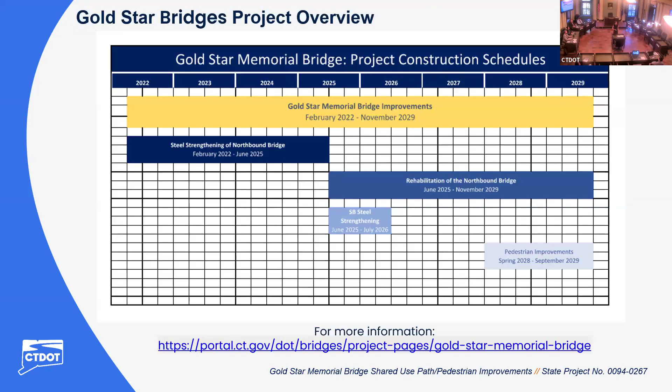At this point, I'd like to turn it over to Michael Giacovino from CJM, and he's going to go through more of the improvements that are proposed on the bridge itself.

Thanks, Tracy, and great job staying composed during the technical difficulties. So again, I'm Mike Giacovino. I work for Close, Jensen & Miller, or CJM, and we are the design engineers who are doing the portion of the path that's actually going to be on the Gold Star Bridge itself.

When I say Gold Star Bridge, there's actually two structures that carry the path. 2514A, the long one, that's what you think of when you think the southbound Gold Star Bridge. It's the large truss, big girder span. Over on the left-hand side of the photo is 2514B, which is a 3-span bridge that also carries the path. That bridge is the connector, the ramp from 95 southbound to Route 32.

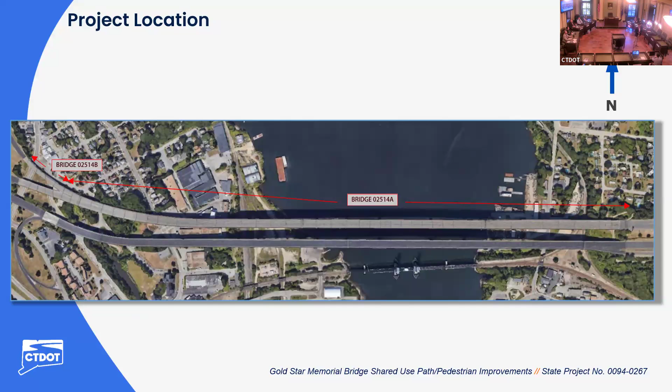Here's a view of the 2514A bridge from the Groton side. We're on the east side of the bridge, looking west. The red line you see is the current alignment of the path. It's going to remain, at least on the bridge, about the same. You can see the dash lines where it goes underneath the bridges to Bridge Street, off to the right in Riverview Ave, it circles up, and it's on the right-hand side of the Gold Star southbound bridge, as I'm sure you all know.

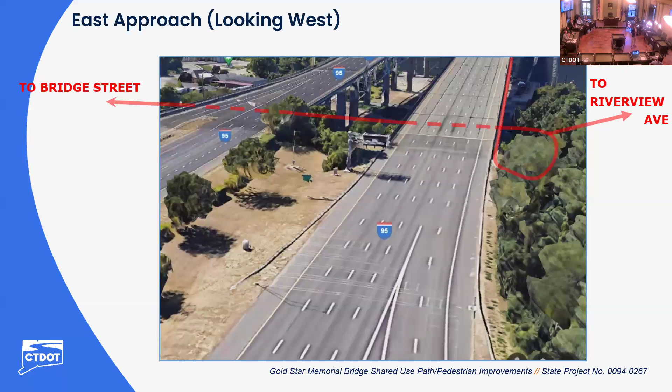Again, this is over on the New London side, still looking west. You can see the path stays on that right-hand side, and it goes up to that blue polygon in the top right-hand corner. That's the B bridge, 2514B, just to give everyone a sense of what the site really looks like.

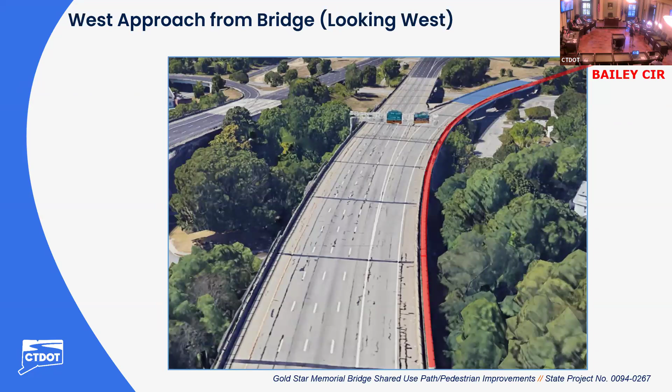So the path is going to remain on that right-hand side on these cross sections. It's left because we're looking the other way in the bridge. You're going to see a series of cross sections over the next few slides, giving you the existing section, which you see on the bottom, and the proposed section, which you see on the top. This is what we're calling the typical section.

This is valid for the majority of the main Gold Star Bridge. In its existing state, you have a give-or-take 5-foot wide pathway, a 10-foot shoulder, and 5 lanes southbound. What we're going to do is remove one of the southbound lanes, and widen the multi-use path to 14 feet wide. So you're going to have a 14-foot wide path, a metal bridge barrier, a 12-foot shoulder, and then 4 lanes of traffic.

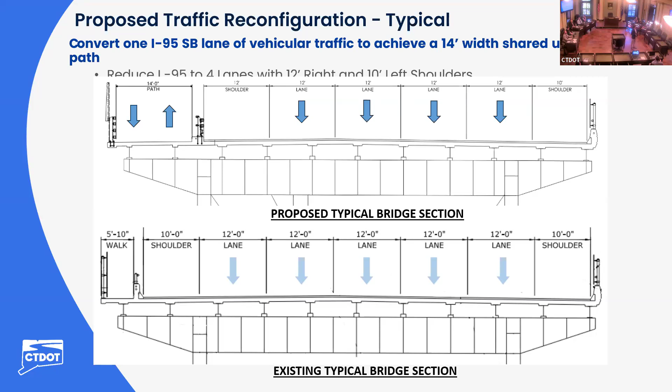This is another cross section still on the main Gold Star Bridge, a little further closer to Groton, in spans 29 and 30. Span 26 of the bridge actually begins to widen from the previous cross section we showed you, and it adds an extra lane. Existing, it's 6 lanes southbound and still that 5-foot pathway. We're removing one of those southbound lanes again, so it's going to be 5 southbound lanes, a 10-foot shoulder, the open bridge rail, and that 14-foot path. That 14-foot path is maintained across the entire bridge, including the next one, which you'll see on the next slide.

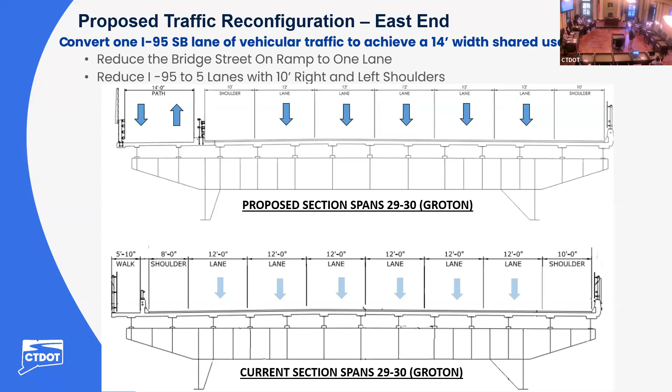This is that B bridge, the ramp from 95 South to Route 32. Currently it's 2 lanes; it's going to reduce to 1 lane with a 10-foot shoulder, and again our 14-foot wide path. So this 14-foot wide path is the nominal width, and like it does now, it is going to have 2 types of pinch points, which you'll see on the next slide.

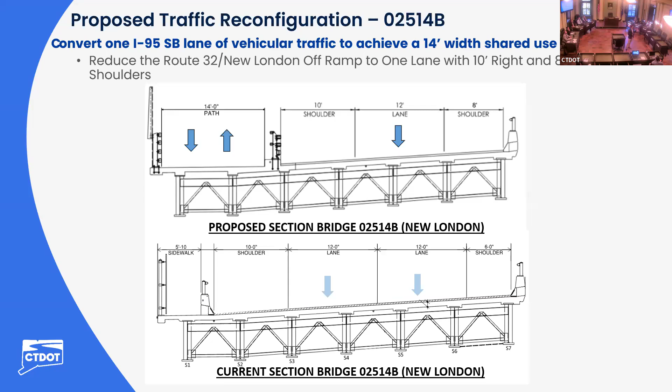The first one you'll see in the rendering on the left is the light poles. Currently, they're mounted to the concrete barrier that separates the path from the roadway. We don't have a concrete barrier anymore, so we need to mount them behind the railing we're putting up. That's going to be about a 2-foot wide foundation. The path will taper out and then back in, down to 12 feet at those light pole locations.

The other one is the large overhead sign supports, which you see in the rendering on the right. Those foundations are a little wider, 3 feet wide, because the sign supports are so large. They're holding up those big giant green signs you see.

There are 3 of these locations: span 7, 15, and 21. At these locations, the path will taper out for 3 feet for the sign support, then taper back in. So the minimum width over the whole bridge is 11 feet, more than double what you have now. That should give plenty of width for 2 bicyclists to pass with room in between—I don't want anyone bumping handlebars.

I actually walked across the bridge a couple weeks ago, and it's tight. I had a bike come up behind me and a moped come up behind me. That's not going to be a problem anymore—well, the mopeds we can't speak to, but it's going to be plenty wide.

In order to build this, it's coming on at the end of the project because they have to build it from the top side. We're going to have 2 work zones: the top one on the main bridge, 2514A, and the bottom one on the B bridge. At any given time on the main bridge, there will be a minimum of 3 lanes southbound, and on the ramp bridge, 1 lane southbound.

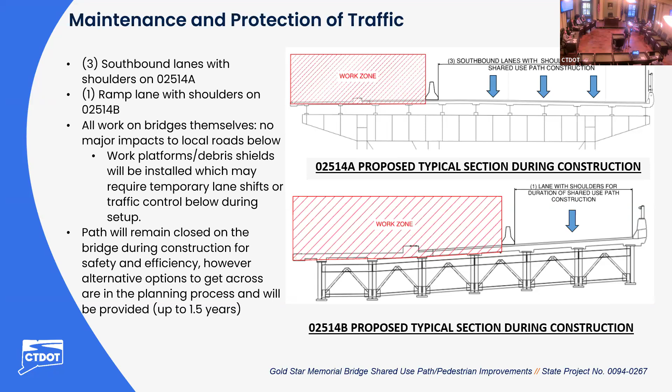During this up to 1.5-year outage, there will be alternative measures for people to get across who do not have a vehicle or are not using their vehicle. It's going to be something similar to the shuttles that were in place during the outage when that fire closed the bridge or the pathway last spring.

Good evening, Steve Frazier with BL Companies. BL, along with HNTB, designed the shared use path approaches to the Gold Star Bridge, as well as the intersection improvements at the Bridge Street intersection. This is the portion of the presentation where we'll go over those improvements. Next slide.

You've seen this area before, but I wanted to highlight the project area on screen. The portions I'll be talking about in this part of the presentation are highlighted in red. On the left side, the New London side, is the connection to Bailey Circle and Williams Street. On the eastern side is the Groton side, connecting Riverview Ave down to the Bridge Street intersection, as well as connecting up to the Gold Star Bridge.

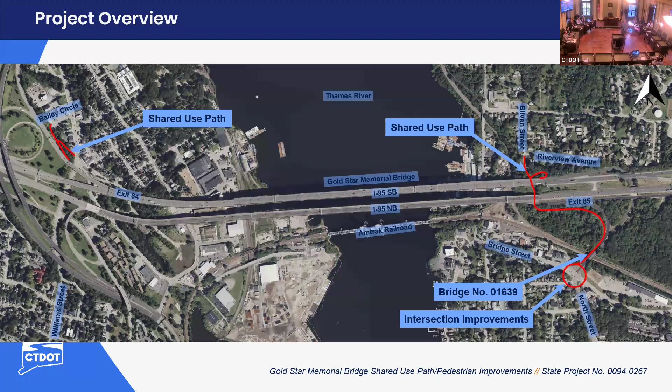Next slide. Some of the existing conditions out there now: the top left photo is of the New London approach. The existing sidewalk is about 5 feet wide, concrete, and gradually comes up to the Gold Star Bridge from Bailey Circle at about 3.5%. On the Groton side, the lower right photo, it's also an existing 5-foot wide concrete sidewalk, for the most part at grade. However, as you're all familiar, this area is the hairpin turn that is very steep. The existing grade is about 8.5% coming down from the Gold Star Bridge and winding around.

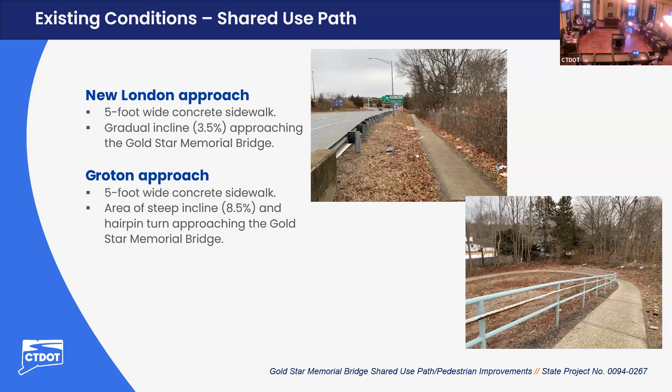Next slide. I want to go through the improvements we're proposing as part of the project. I'll start with the New London side first.

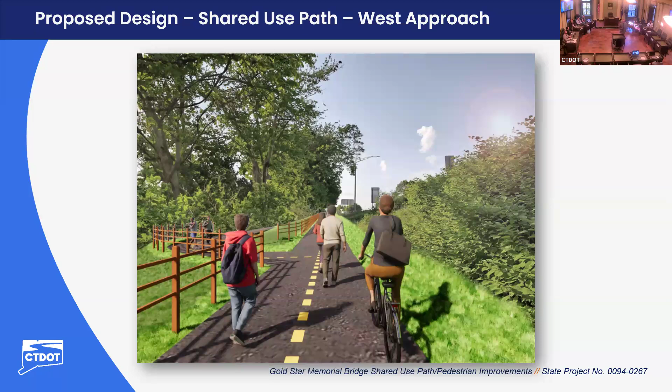The second thing I want to highlight is on the north side, that hairpin turn. We're extending the path toward the east coming off of the Gold Star Bridge to allow us to have a proposed grade, coming down the hill, of just under 5%. To remind you, the existing grade is 8.5%. So this allows us to meet requirements and it's a safer path. We do anticipate the potential need for a retaining wall on the north side of that turn, to prevent any of the grading from extending onto private property.

Also on the north side, we're replacing the connection to Riverview Ave. We're maintaining that connection, but reconstructing it with the 10-foot wide trail. The last part I want to highlight is as the shared use path winds its way southward, toward the bottom of the view, the on and off ramps coming off of exit 85 are supported over the Amtrak Railroad—it's bridge 1639. The shared use path is going to be reconstructed on that.

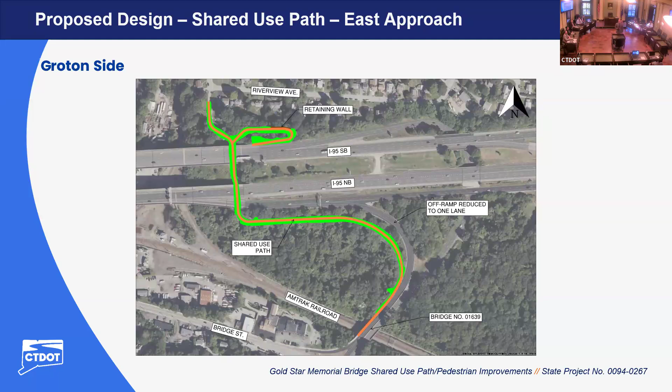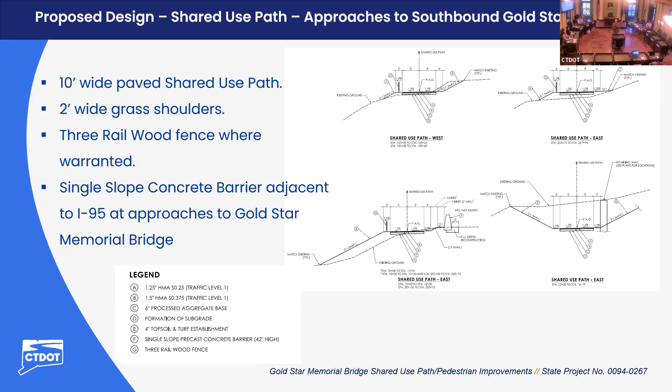We will be providing a 3-rail wood fence to discourage trail users from going off the trail and down a steep slope where it's warranted. We'll also be providing a concrete barrier, a single slope concrete barrier, between the shared use path and I-95 proper as the shared use path comes off the Gold Star Bridge on either side.

So what we're able to do for our proposed work is to remove that existing sidewalk and widen into the road, toward the right-hand side of that view. At the same time, we'll be removing one of the lanes of the off-ramp so that in that area we'll have 1 lane of traffic coming off of the highway over the Amtrak bridge.

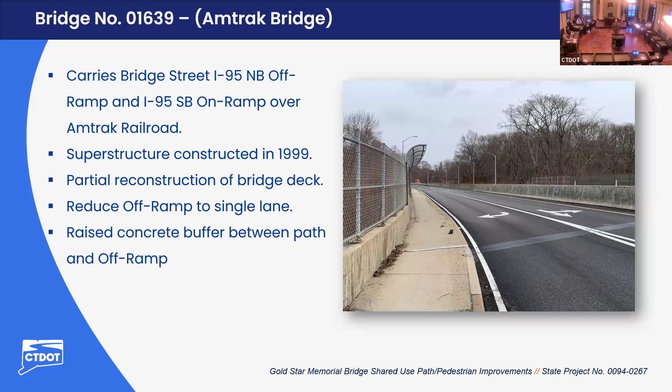On the next slide, it's a conceptual rendering of what that area might look like after construction. In the far background is the shared use path crossing the bridge. There's a small red strip in this view - that's the concrete buffer that's going to be raised, separating the 10-foot wide shared use path from the off ramp. In the foreground is a pedestrian crossing associated with the Bridge Street intersection improvements.

And with that, I think I'm going to hand it over to HNTB to go over the Bridge Street intersection improvements.

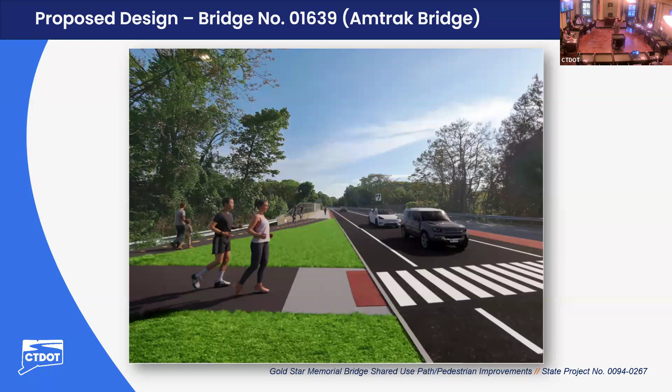So this here is just the existing conditions at the intersection. There's Bridge Street, and we're labeling them here east and west just to help differentiate them, North Street, and the I-95 on-off ramps. In this whole area, it is essentially a bowl - the center of the intersection is lower than the surrounding approaches, which requires us to raise up the intersection in order to put in a roundabout.

I did want to highlight that currently the crossing widths at this intersection are really wide, which doesn't really invite or encourage people to walk in this area. There are only 2 legs of this that currently have crosswalks, so again, not very connected. There's just so much going on, it doesn't lend itself to people wanting to walk - people don't feel safe crossing this area.

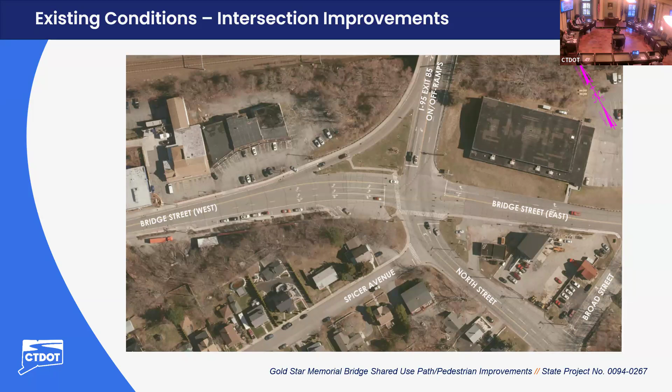So one of the things that we're proposing is a roundabout.

For our proposed design, we have a hybrid roundabout. It's not quite a turbo roundabout because we have 2 lanes coming from North Street - they go around part of the roundabout and then onto exit 85. But most of the other approaches, it's 1 lane in each direction. As you can see here, that's really reducing the amount of the crossing distance at each approach, and we would be increasing the number of crosswalks.

Also, on the upper left corner, what was a bypass lane coming off of exit 85 is now being turned into that shared use path and also a more green area rather than having that bypass. We tried to keep some of the existing parking over on the western portion of Bridge Street as well.

The nice thing about roundabouts is that it really slows people down, and so that increases pedestrian safety. We have the shared use path coming off from exit 85, but along the roundabout in those thicker gray areas, those are 10-foot wide paths connecting all the way around for shared use path, and then it would be connecting and tapering down to 5-foot wide sidewalks at the approaches.

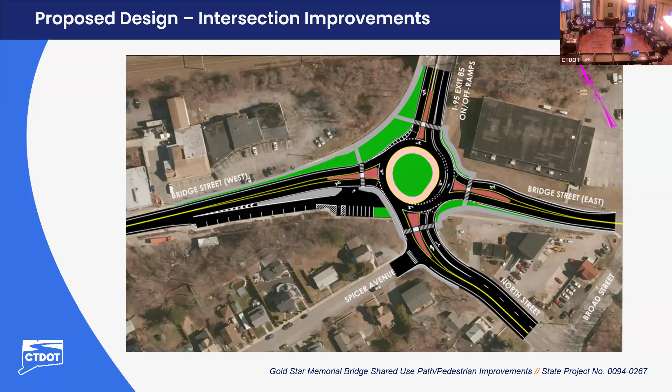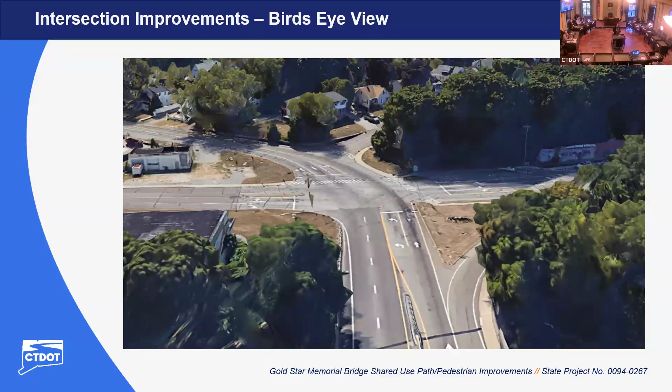This is just an image of a bird's eye view of the existing intersection, and here is a rendering of what this would look like approximately. You can see that path I was talking about, now on the lower right corner, would come around, and you can see where the crosswalks connect to those wider paths.

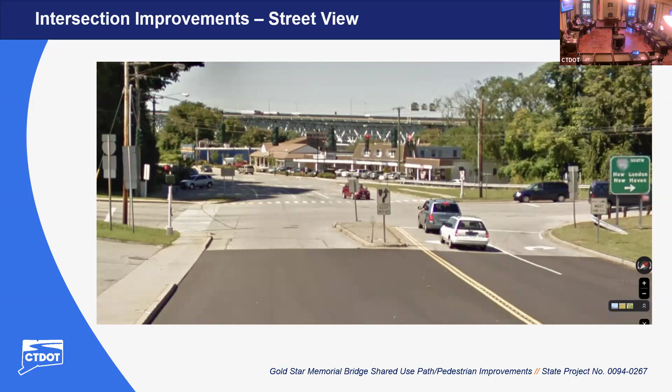This is on Bridge Street from the eastern side looking towards the west - existing condition, again really wide crossing areas. And this is a rendering of what it might look like in the proposed condition: again, more narrow crossings, as well as pedestrian islands and a truck apron and everything like that.

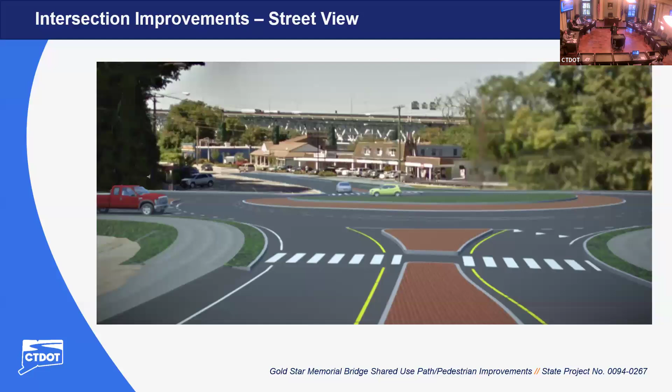Next slide, and I'm going to pass it off to Dave.

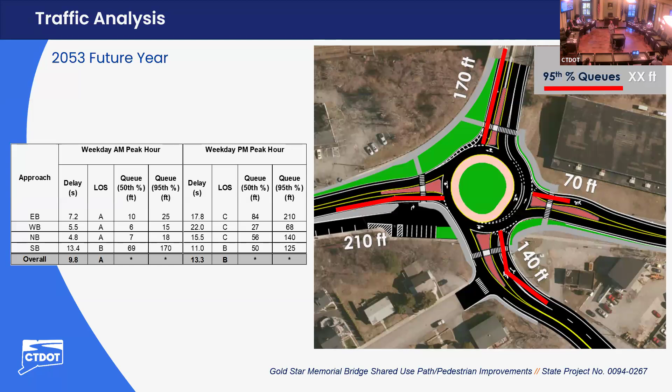It becomes a much more livable experience as opposed to a signal where you're waiting for that NB flow to come out of the south, which is an important place, but they do tend to dominate the intersection. This roundabout is going to be a great way to accommodate all of the users at this intersection, both vehicles as well as bicycles and pedestrians. As Sam noted, these are great means of slowing vehicles down and improving accessibility through the intersection for all the users in the area.

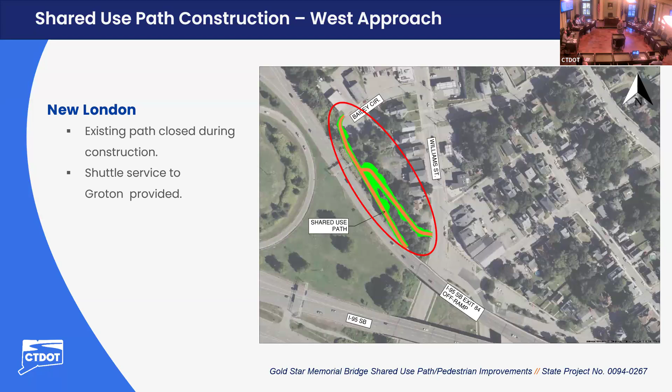Access from Bailey Circle to the Gold Star Bridge will not be provided during construction on the existing trail. It will be closed, and shuttle service would be provided to Groton. Next slide.

Regarding the Groton side of the shared use path, I want to highlight a couple different areas here. As I mentioned previously, the shared use path access over the Gold Star Bridge, circled in red on the top, will be closed during construction, and that area we anticipate to be constructed during the closure of the path on the Gold Star Bridge, kind of maximizing that closure time.

The other two areas circled in red, we anticipate short-term duration closures of the shared use path between Bridge Street and Riverview Ave. The middle red circle is a short-term closure because of improvements proposed under a separate project on the northbound bridge. And the lower circle, we expect short-term closures to construct the shared use path under this project.

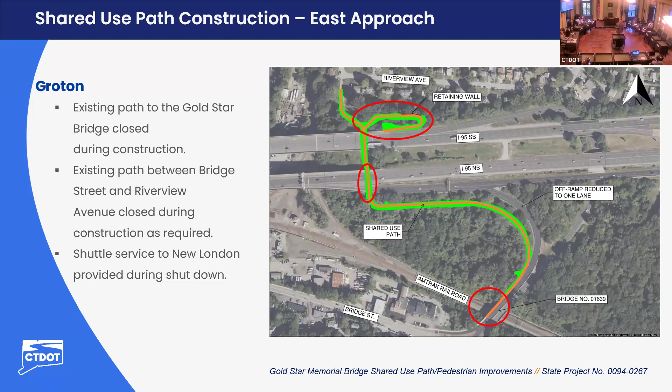Ultimately, we want to try to maintain access from Bridge Street to Riverview Ave as much as possible, so that will be an important aspect of the contract documents as well. Finally, during the closure where people cannot access the Gold Star Bridge shared use path itself, a shuttle will be provided to give that access to New London. Next slide.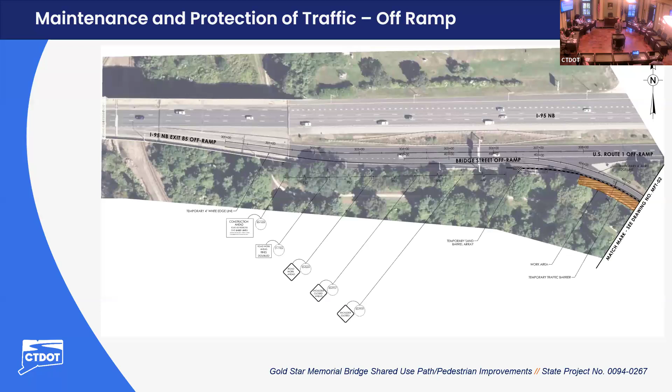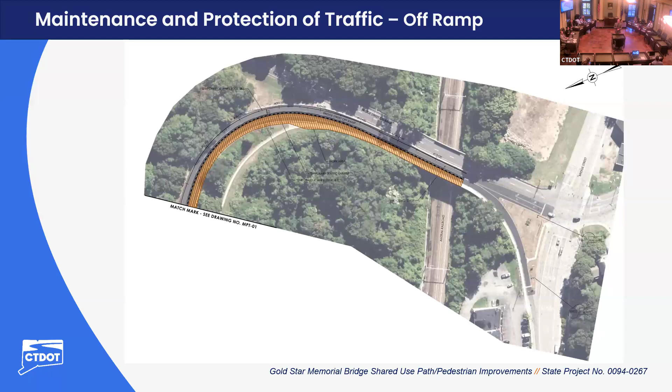The improvements over Amtrak Bridge 1639 will require a narrowing of the off-ramp that's there now. These two slides are meant to be pasted together, showing that traffic coming off of exit 85 will be shifted to the left-hand side of that off-ramp, reducing it down to one lane. That will provide a construction work area around the curve and down across the bridge, facilitating the shared use path construction as well as the construction on the Amtrak bridge.

Next slide. And I'll hand it over to Rudy to go over the Bridge Street intersection construction. Great, thanks Steve.

It's important to note that we are currently in preliminary design, and what I'll be talking about next is the construction staging of the roundabout area. We are currently envisioning the project to take just under 2 construction seasons. As the design of the roundabout gets refined, so will our construction sequencing of the project.

We will try to minimize not only vehicle detouring but also pedestrian detouring through the construction zones. We do anticipate there will be some, but they will try to be minimized. While construction is envisioned to take just under 2 seasons, we are envisioning the project to be constructed in 4 different phases. As the design gets refined, so will the construction sequencing, and with those 4 stages of construction, we might introduce some substages as well.

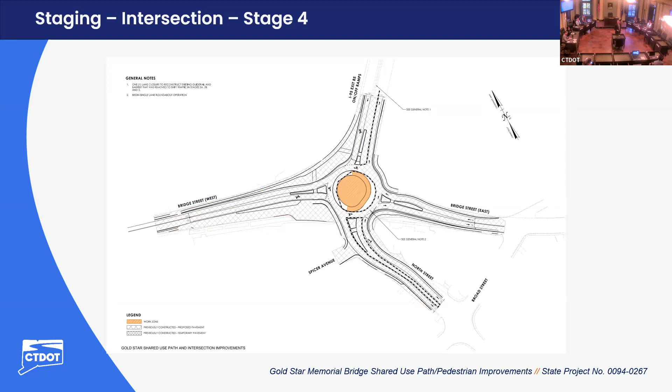Speaking briefly to the rights-of-way impacts anticipated for the project, it's really going to be minimal property impacts anticipated. As mentioned on the screen, we do anticipate the need for a retaining wall, and so a construction easement, a temporary easement, we're anticipating the need for that. All of this impact is based on assessing the GIS information that's out there, which is a publicly available approximation of existing property lines. It's not 100% accurate, so these impacts would need to be reevaluated once we have the completed survey in place.

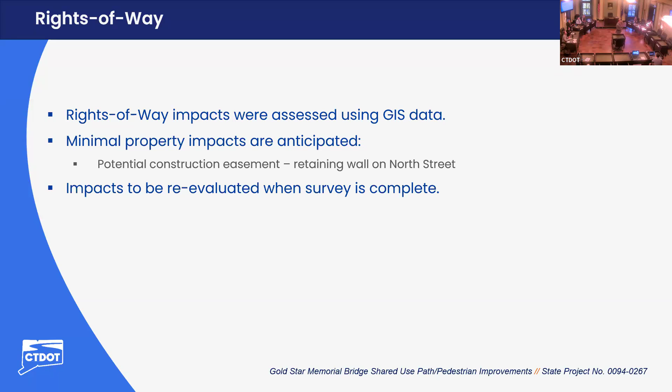Thanks, Steve. I'm Matt Giannakopoulos, a project coordinator with the Department's Division of Rights of Way.

As Steve just mentioned, we anticipate that there may be a need for some temporary construction easements to be acquired in order to build the project. So I'm here tonight to give a brief overview of our acquisition process in the event that's necessary.

When we talk about temporary easements, we call them construction easements. They're a type of property right that the department acquires when it needs to use private property to construct a project, but doesn't need to use the property once construction is completed.

Like Steve said, we're going to work through the details once we get surveyed to assess the needs. Any necessary construction easements or other property rights acquired for the project will be acquired in accordance with Connecticut General Statutes sections 13A-73 and 13A-98E. And whenever there is federal money used in any phase of a project, the department must adhere to the Uniform Relocation Assistance and Real Property Acquisition Policies Act of 1970.

Once the design has progressed further, we've done the survey, and we know exactly the extent of any property rights the department needs, we're ready to begin the acquisition process. Each impacted property owner would receive a letter of intent to acquire, along with a property map depicting the exact rights to be acquired.

At that point, we determine the fair market value of those rights and use that to establish an offer of just compensation. That offer gets sent to the property owner in writing, and a right-of-way agent from our office is available to meet with the property owner.

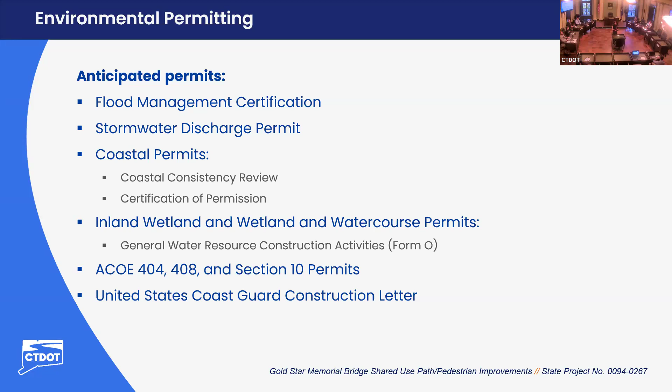As Rudy mentioned earlier, we're currently in the preliminary design phase, meaning we're at about a 30% level. Based on the current design, the construction cost is estimated to be $55.5 million. As I mentioned previously, construction start is anticipated to be in spring 2028 and be completed in fall 2029.

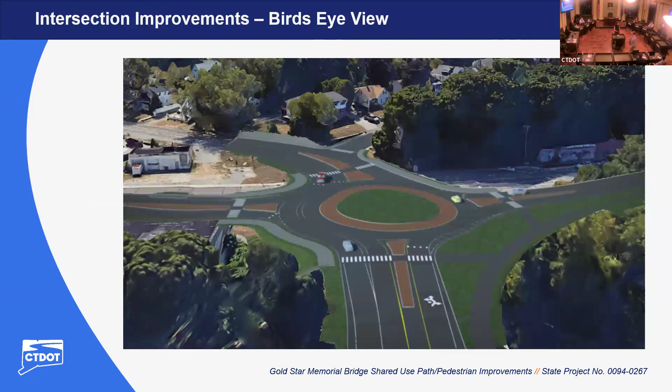There is a rendered view, yeah, quite a few slides back. Shannon, would you mind— oh, sorry, it'll be towards the end of my part. Yeah, sorry, it's a while back.

Right here, so there's two rails. If you're looking at the screens, there's two rails to see here. The one in question is on the left-hand side. The render doesn't exactly match it—it's a four-rail system, I believe, what we're dealing with here. But you get a good view of the one on the outside face. It's not a test level 5, but you can see on the right-hand side of the rendering, it's a pretty small gap. Again, it's not the exact rail in the rendering, but it kind of gives you an idea of what it will look like.

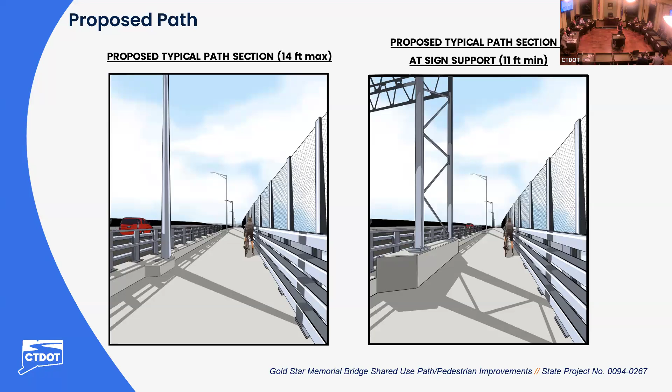Any other questions? If not, all right.